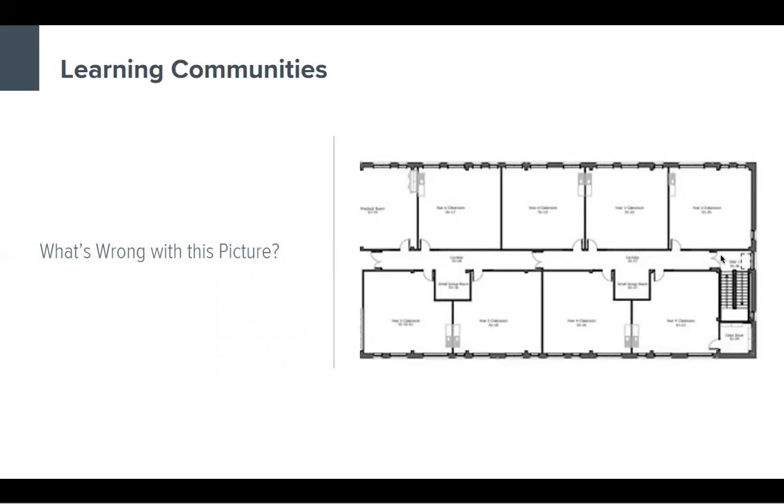But it's really an egg crate, and it's a multi-story building with very little connection between the floors, no connection between the classrooms, and narrow hallways void of just about everything. So step number one, we've got to get away from that.

So what if we actually created communities, learning communities that support collaborative learning? And we began to think about the idea of a front porch. In a neighborhood, you can sit on your front porch and it sort of creates a sign that maybe you want to talk to your neighbors or just see what's going on around you. So it's sort of that interstitial space between the privacy of your home and the public nature of the street. Well, we can use something very similar in an educational model as well.

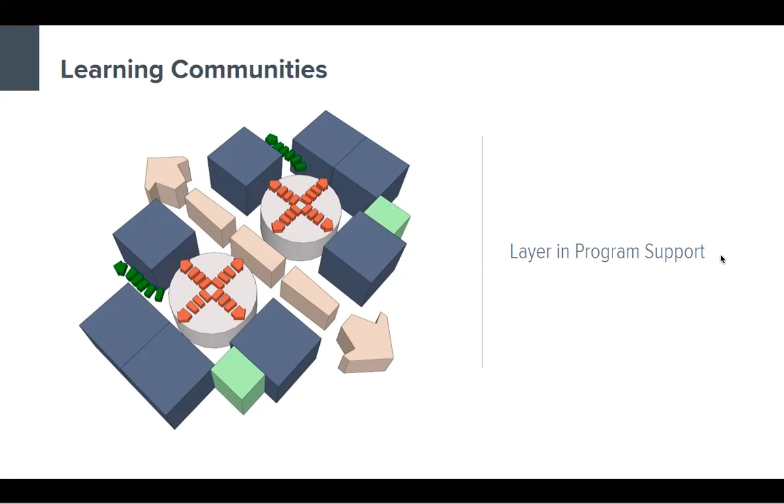And as we'll see in a few minutes on this campus, there was a beautiful creek running through the center of it. So to be able to go outside and get down to the creekside classroom and do other activities there in the courtyard was really important to the overall design of the school. So we're not just looking at the building itself, but we're looking at how the connection between indoors and outdoors can promote PBL teaching and what we can do outside to support those as well.

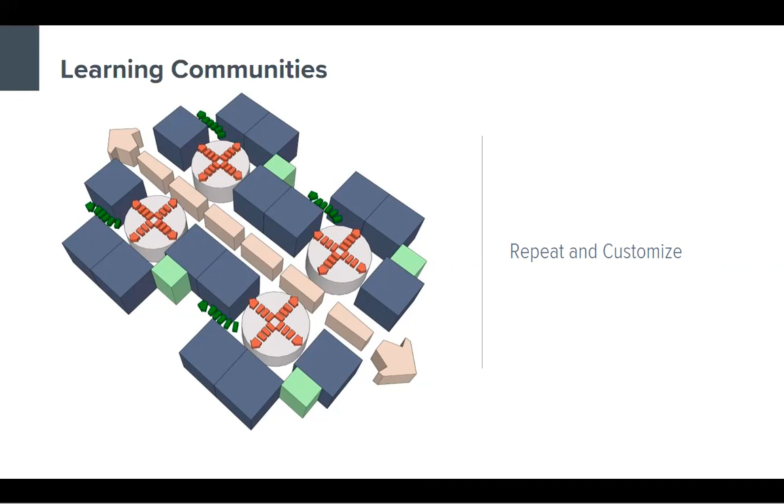But what we actually were able to do, and it's even more obvious in the middle school, is we were able to shorten the hallway length and distribute some of the overall length of that hallway into the collaborative spaces. So it actually made a more efficient floor plan with more square footage of the overall plan usable for education and learning purposes.

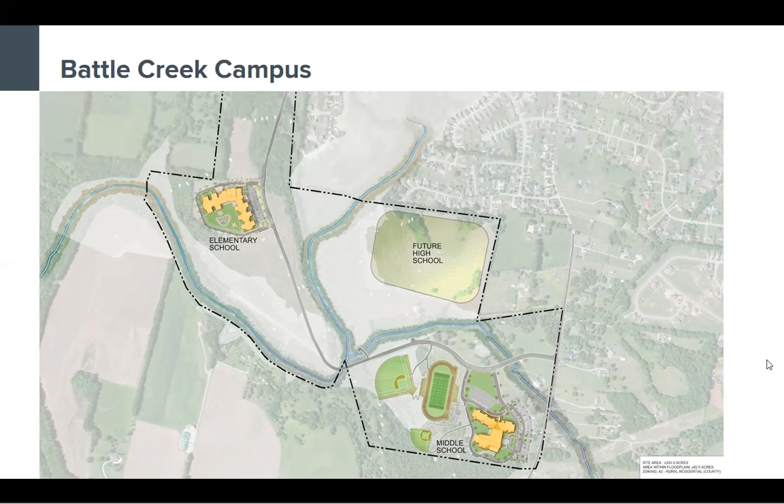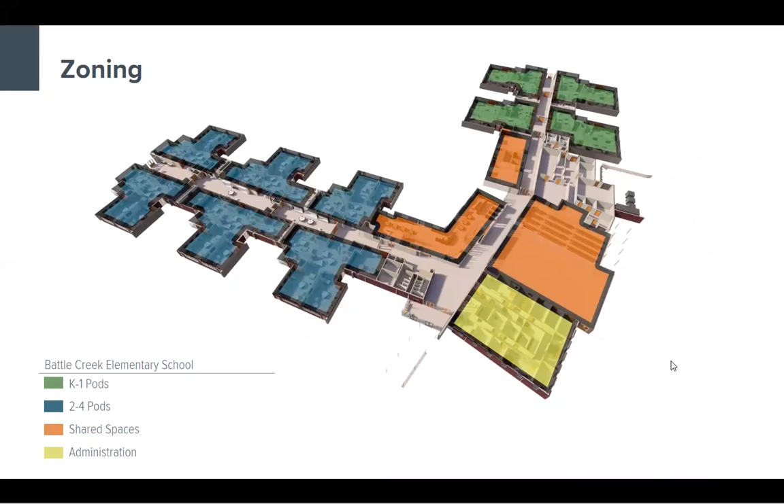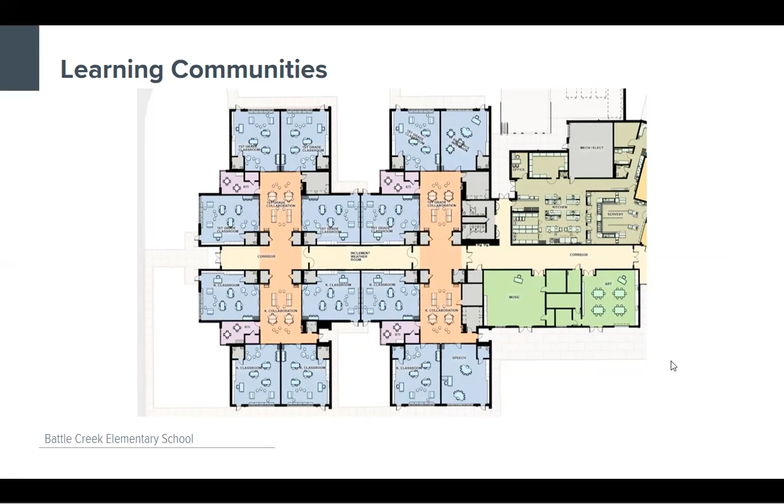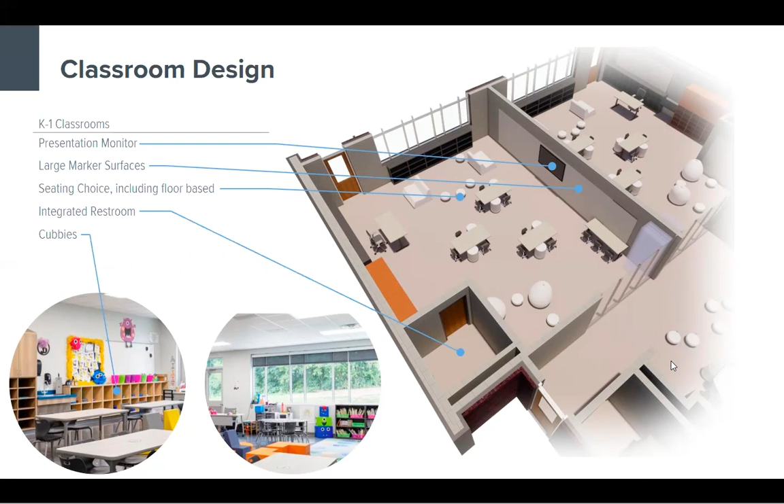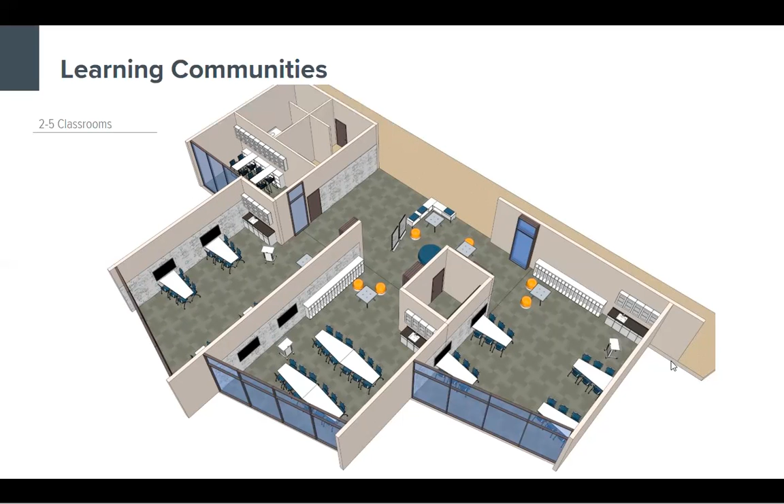We actually talked quite a bit about the front of the room. Does the classroom get a front of room? Does the teacher need a desk? Does she need a lectern? Does he need space to store his personal things? And so we actually settled on a lectern in our original planning with some casework behind it with a little bit of lockable space. By the time we got to final documents, each teacher did in fact have a stationary desk, and I think they appreciated a little bit of a landing pad. But based on the overall classroom design, teachers are still up and moving around and really engaging within the classroom.

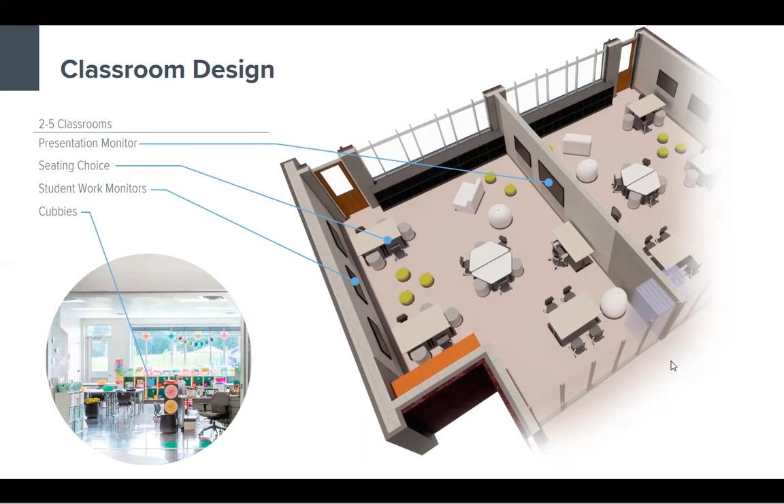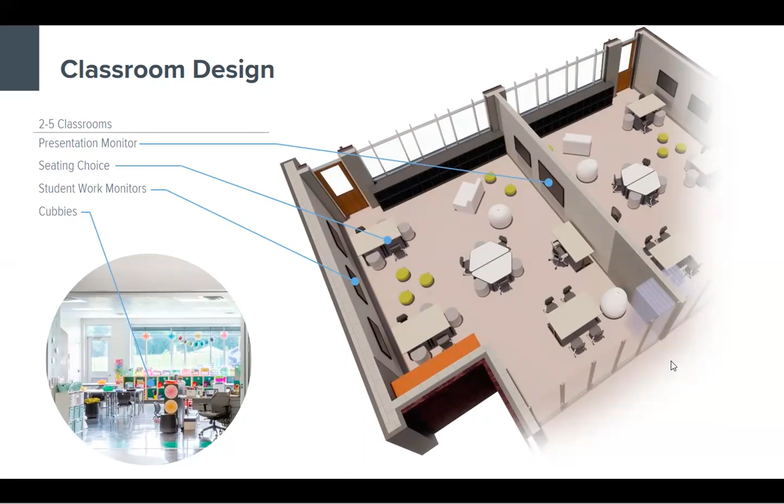So kind of zooming in on this classroom, it's a lot of the same concepts, just modified for the older age of the children. And like Ben mentioned, we do still have that larger presentation monitor that is teacher focused, but here you start to see the addition of more monitors. And while maintaining the flexibility of the furniture within the room, sort of syncing up some of that furniture with the monitors for small group use, that allows students to project directly to those individual monitors. This really reduces the front of room approach and allows visibility and mobility throughout the space.

But we still have provided, as you can see, a lot of different options within the seating that allows kids to have choices in play. So whether you have a wiggler or a stander or a floor sitter, or somebody who just wants a normal chair, they have that flexibility to kind of rearrange and maybe even make a choice from day to day within this arrangement.

Yeah, so for my personal learning style as an introverted wiggler, I guess I would be sitting on a stool in the corner in this example.

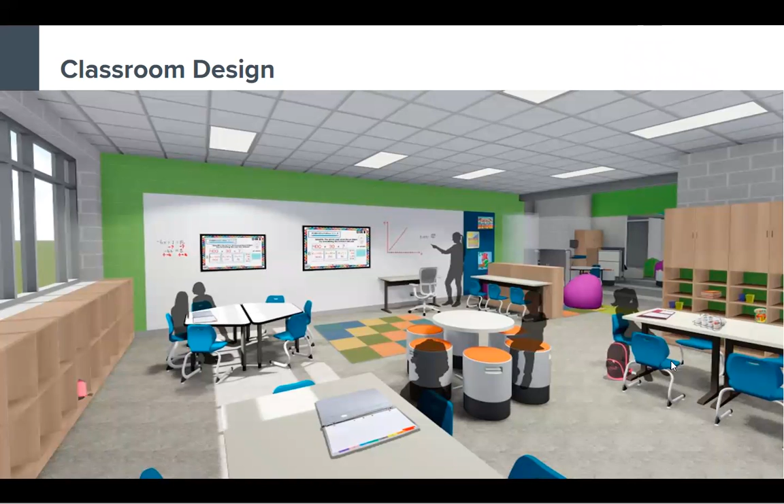So here's a rendering, not quite as early as the one we looked at before, but you can start to see how we illustrated this and also introduced the storage component within the classroom. So there's a lot of writable space, all magnetic. We do have a little bit of tack board, but trying to kind of marry that and have that dual function where it's writable, but you can pin things up, artwork, student work, things like that on those writable surfaces.

Storage for students that is personal storage, but also on the right-hand side, you see those student-centric storage cubbies where things that are kind of makerspace-like, but that actually live in the classroom themselves are easily accessed by students as needed as they're in their self-directed learning. And then you really start to see the different options in seating and furniture arrangement. We have little stools that allow for movement. There you see the chairs, you also see the floor seating area with little carpet squares, and then beanbag chairs, kind of just that big variety starting to show up in a rendered format.

So focusing just a little bit on the middle school. The middle school is a two-story design. It's actually sort of built into a hillside. So we had some unique opportunities for multi-level outdoor spaces. This begins to show one of the neighborhoods for the middle school. So each neighborhood is actually a two-story design. So similar grades are on the first floor and the second floor. And each pod actually has a connecting stair with glass to the outdoors.

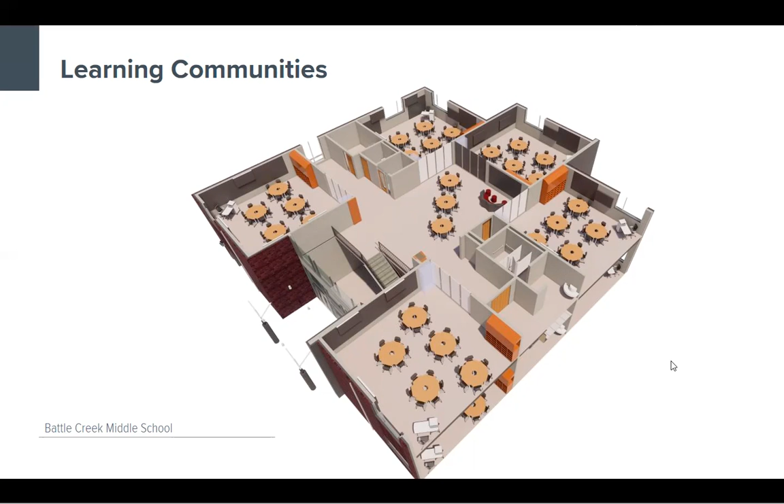This is a view of the overall middle school. The entry is here in the front in the middle. This is a 1-story portion of the school as the site is higher at the front, and then the site actually slopes into a 2-story position here at the rear. So that also gave us a great opportunity. Once you come into the building, you have a nice generous lobby. You have a large connecting stair that moves downstairs, and also a railing that overlooks more public space as you access the gym and practice gym in the more public areas of the school.

Another thing that we were able to accomplish with the specific site condition is this building actually has no fire stairs. So there's a central sort of collaboration and connectivity stair, and then there are stairs in each of the student pods in blue. One of them actually does have a door, so it acts as a fire stair, but it's very open, very inviting. We know that stairs are actually one of the places on our list of spaces where bullying begins to happen. So the more open and the more inviting those spaces are, the safer students are within those spaces.

One other thing to note here in Murray County, 5th grade is actually part of the middle school curriculum. So you can see that space in green. And we actually modeled those directly off of the pod design from the elementary school and duplicated that onto this position of the school. The blue are the more specific to the middle schoolers that we looked at in the last slide. So it actually gives the 5th graders a little bit of an opportunity to be separate over here in their individual wing. They have a classroom style and a learning style that they're still familiar with, but they're beginning to slowly integrate into middle school.

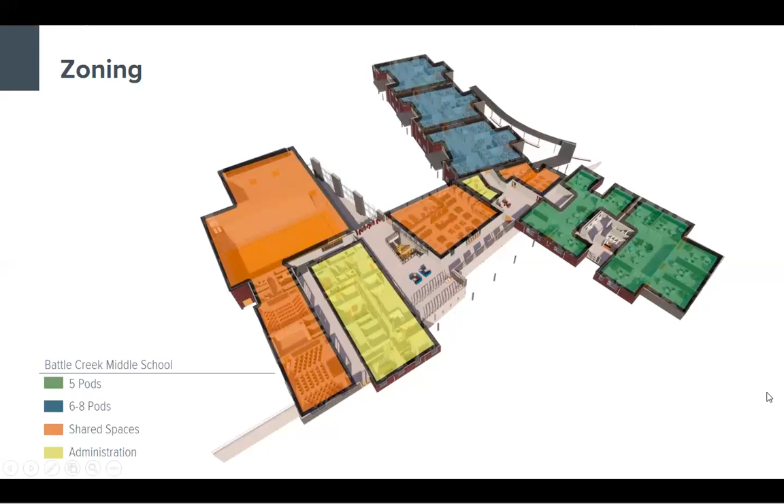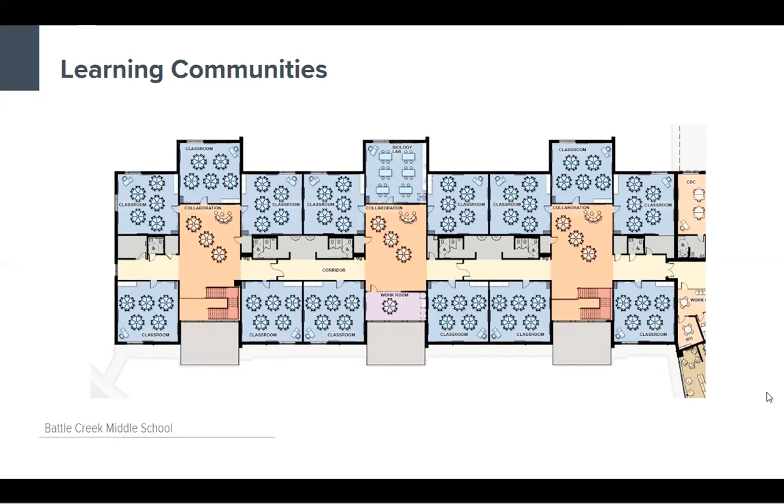Once again, the yellow is administration. The orange is central public spaces. So this is a floor plan of the middle school. Students are also beginning to deal with more autonomy at this level. So we didn't have specific faculty workrooms directly off of each pod. You can see one in the center so that teachers can come to that position and do some work if they need to, or provide some one-on-one tutoring. But really, we're beginning to give students more autonomy, more room to roam, and just more independence in general.

So this is a view of the middle school collaborative zone, really similar theme to the elementary school, just updated strategies here. A little bit bigger furniture, of course. So starting to take a look at that specific design for the 6th through 8th classrooms. As Ben mentioned, the 5th grade classrooms are sort of a duplication of what we saw in the elementary school. But here in the 6th through 8th classrooms, you start to see a lot more independent learning and self-directed learning, some group work, but still independent from the teacher.

So we do have the presentation monitor here. We have monitors throughout the space for visibility for students. Instead of the lecture style, row after row, where everybody needs to be in a specific position to be able to see the screen, we can do a more collaborative approach with the furniture, as you see, and everybody still can see what's happening as the teacher is projecting what they're working on. But if you see in the photograph, the tables are still individual. So if you have a group of 4, that works. If they need to expand that into a group of 6 or decrease to a group of 2, that flexibility is there. And they have access to be able to see the presentation monitor and access to whiteboard walls all the way around the perimeter of the space.

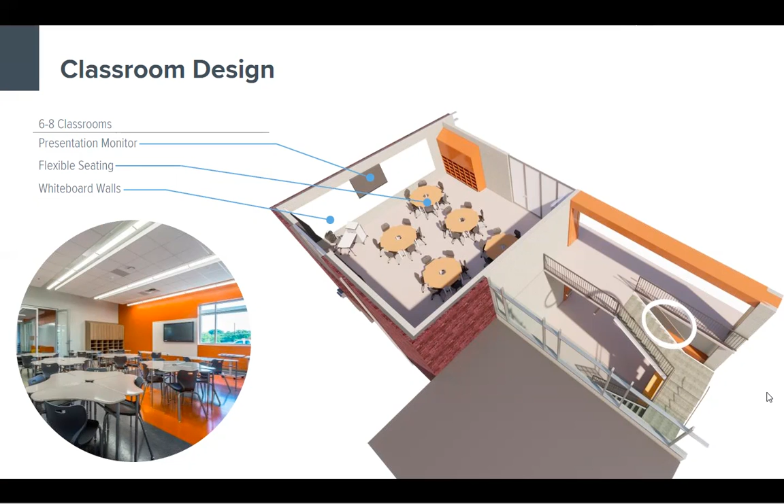And one thing to start noting here that we'll look at a little bit further in the presentation is natural light. Everybody that has worked on school design knows wall space is a premium. So whether it's windows or writing surfaces or storage cubbies or presentation monitors, you really have to balance all of those things. So here in the middle school, we actually reduced the size of the exterior windows just a little bit to accomplish our overall goals for other wall-based functions.

So let's talk about the media center just a moment. What's a media center anymore? I think a library is probably the most heavily questioned and the most flexible space, and potentially even a space that people wonder, where's it headed? What's it look like? Do we even need it anymore? So we actually had a lot of fun working on the media center in this school. As the center of a PBL curriculum, we knew that it was far beyond just a space to store books. And actually the number of books is even less than we originally anticipated when we were designing the space. So it truly becomes the heart of a PBL curriculum, and it's located at the heart of the school, right off the lobby, with lots of glass and connectivity.

Like any good media center, there is a space here for kind of a story time space. So we can actually get 3 different classrooms together for a presentation. And of course, on the left, we see some cubbies. Students love those, providing different areas for them to be by themselves or read a book together with a friend, and also provides some general space separation as well.

So looking at the plan of this space, one thing we were told right off the bat is, based on the school's budget, they would only ever have 1 librarian, but they wanted 2 media centers. So we said, let's combine them, but let's put the control position at the center so you can see both directions and provide support to both the younger and the older students, but create a little bit more of a separated space as well. So you can see here in the center is that story time zone, right off the lobby, right off the main entrance, with the younger students having their space on this side and the older students in this direction.

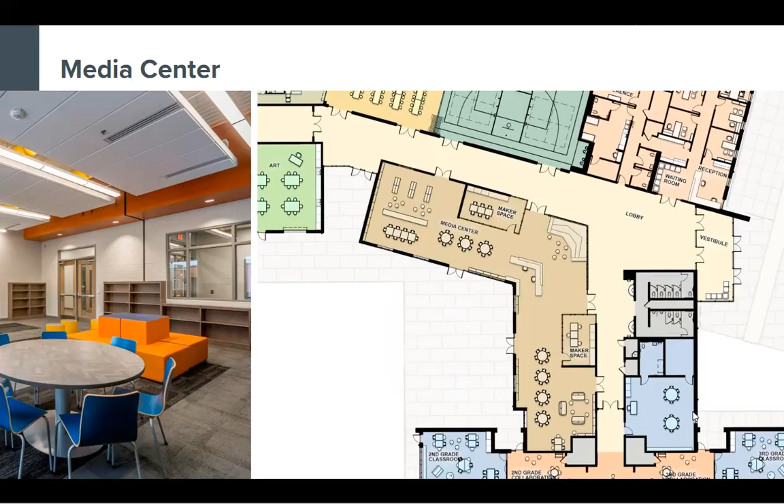Here's a couple views of the media center. You can see directly into that makerspace there. Lots of pegboard on the wall, lots of space to store projects and materials.

And this is one of the spaces, each of these within the school, where students can actually begin to host semester-long projects. So you can actually secure the door when necessary so that things can grow or age over time, depending on the project you're working on, or just sit in between work sessions. So you have a secure space for that to sit and land throughout the semester.

On the right, there were several spaces throughout the school where we actually color coded the different utilities, once again, providing a learning opportunity. So you can begin to talk to students about fire suppression and hot water, cold water, different air movement. We also, in the school, all of the server rooms had glass doors and they were lit so that you can see into those rooms and see the computers and not just hide those behind solid doors. So really trying to create educational opportunities in the building as well.

This is a plan of the upper school or middle school media center. We actually put a STEM lab directly in the media center here as well so that they can have an even larger version of that makerspace. It can be used for separate classroom time. It can be used for a larger STEM lab, or it can be used in conjunction with other media-based projects.

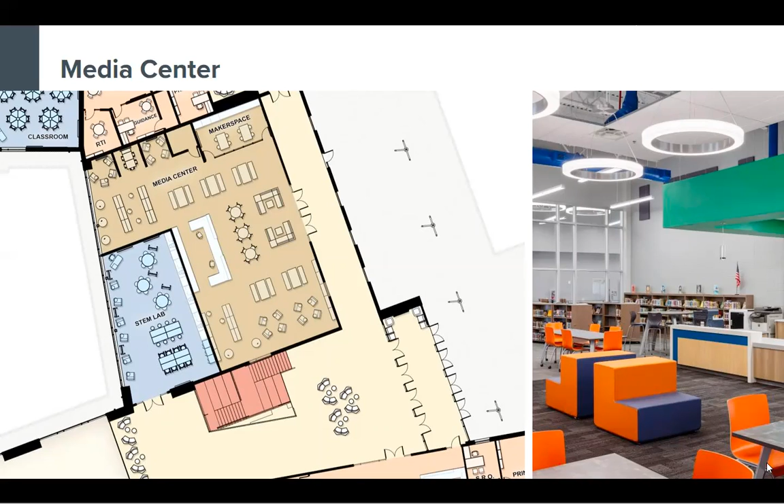So in addition to the media center being sort of the hub of the school and the place where students from different classrooms come together and work on projects that are from different disciplines, we wanted to think about opportunities to do that throughout the entire school. So we came up with a couple of different ways to handle that and thinking about using both larger spaces and smaller spaces.

So here you see an early rendering of the corridor on the kindergarten first grade wing and bringing a life to that corridor and a place where classes and education can actually happen. The corridors are a little bit wider here to allow for that, to allow for a gathering of students. And so you actually see artwork being displayed, but it could also be a place where students could come together with a teacher and learn.

Up in the upper right-hand corner, you see the backside of the cubbies that we saw in the media center, but we used the backside to provide a writable surface and desk or tables so that students could actually have a class here. And in the bottom right-hand corner, you see the art room for the elementary school, which has a glass garage door that actually opens onto a patio space designed specifically for that art classroom to be able to move in and out of the classroom as needed.

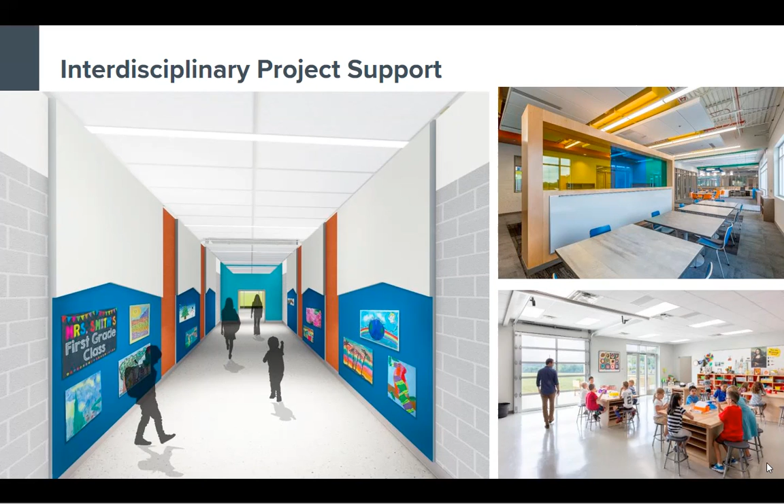In general, we really feel like schools over the last 50 years have begun to actually get more boring, with cheaper materials and lots of thought towards long-term durability. And those are important things. Budgets are realities, and durability is a very real thing. But we wanted to give students a sense of ownership and a sense of place, and owning something nice, being in a space that inspires them with natural light and not designed down to the minimum square footage everywhere.

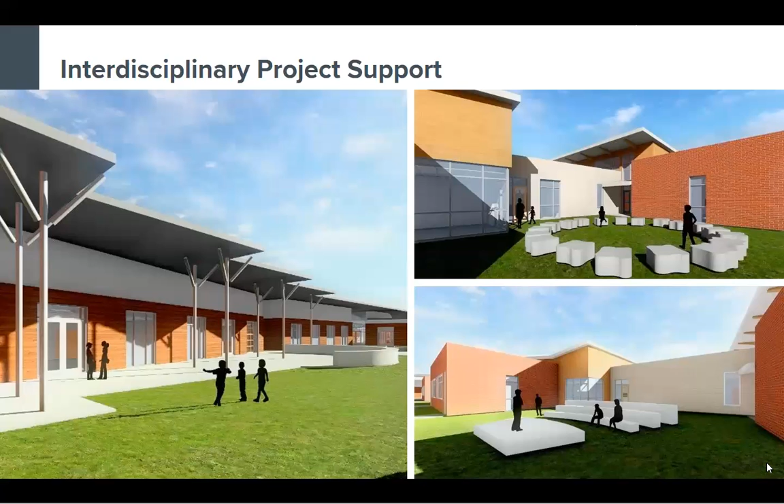This school, over the past couple of years, we've been lucky enough to win several awards, both for design, for educational space, and for all sorts of different overall subjects, interior design as well. But as lofty as our goals were in the beginning, not everything came to be. So here I actually wanted to highlight a few things we didn't get to add into the project. In the top right, you can see some tall roof section with some roof glass monitors that would have allowed more light down into the collaboration spaces. That was something that unfortunately the budget didn't allow for.

We also had some ideas about creating really specific outdoor learning zones. You can see the campfire ring and the amphitheater style learning. Those were not nixed entirely, but they were deferred and will likely be built in the next couple of years, but we weren't able to afford those right off the bat.

And on the left, you see there in the center, the door that opens up to the art classroom and also goes into the central portion of the school. So we wanted to include some outdoor roof area and a seat wall and a larger patio here for those craft projects to move outside. And the patio and the seat wall will happen in the future, but are not there yet. So it's not a bad thing to weigh different things along the way and take some things back out of the design, but be proud of what you're left with and make it the best you can.

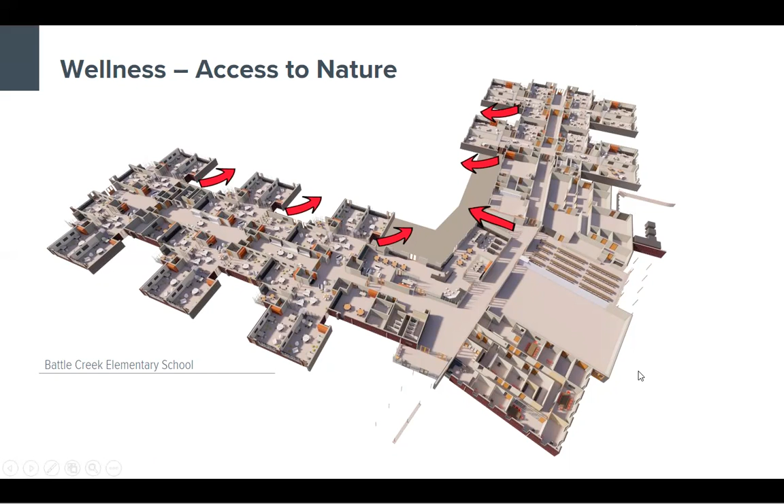We actually carved out a little bit of square footage so you can get directly from the central corridor to the outside as well. We fought hard for that so you can get from the cafeteria to the central courtyard without having to go through a classroom. And this is an overall view of the elementary school. You can tell it is largely designed around that central secured play space. Each room has easy access to that. And then of course the creek is down to the left with a future outdoor creekside classroom planned for down there as well.

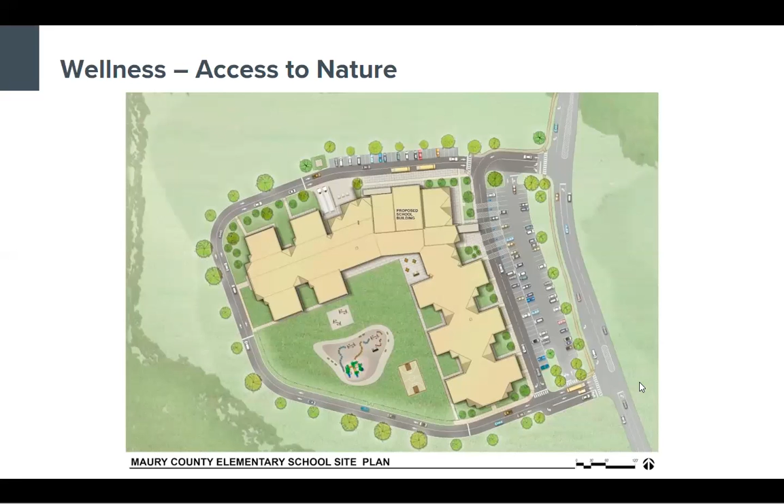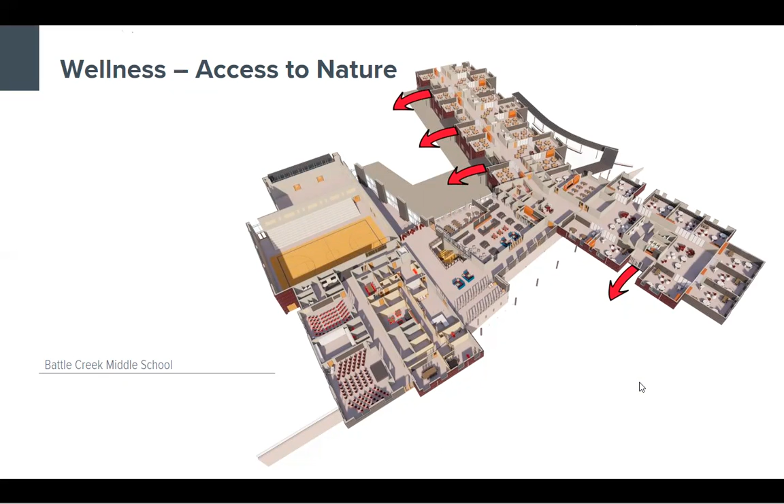And an overall view of the middle school. These work just a little bit differently with the two-story arrangement at the top, but students can move down the stairs to their central courtyard for the older students. And then the fifth graders actually can move from their pods to a play space out front as well. So separated outdoor spaces as well as indoor spaces.

And this is a view of that overall campus. You can see the entry to the bottom right. Lots of parking with overflow parking, and then the students that arrive by bus arrive at the top of the page so that they can queue in different areas and wait for the bus or their parents in different spaces.

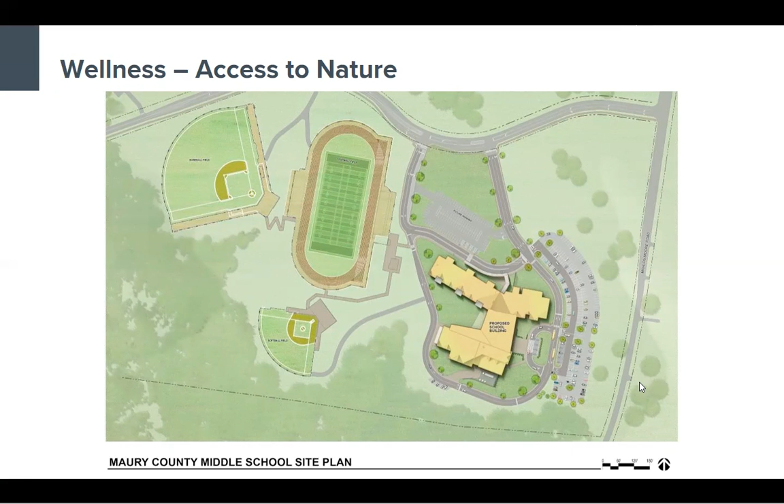So health and movement are an extremely important factor when it comes to wellness in education, for both the physical and the mental learning and well-being of students. So there were several things that we did, both big and small, to try to incorporate health and movement into just the everyday use of the building. Obviously, a gymnasium is a dedicated space for learning about health and movement, but we wanted to incorporate details that would allow for that to happen maybe when students didn't even recognize that it was happening.

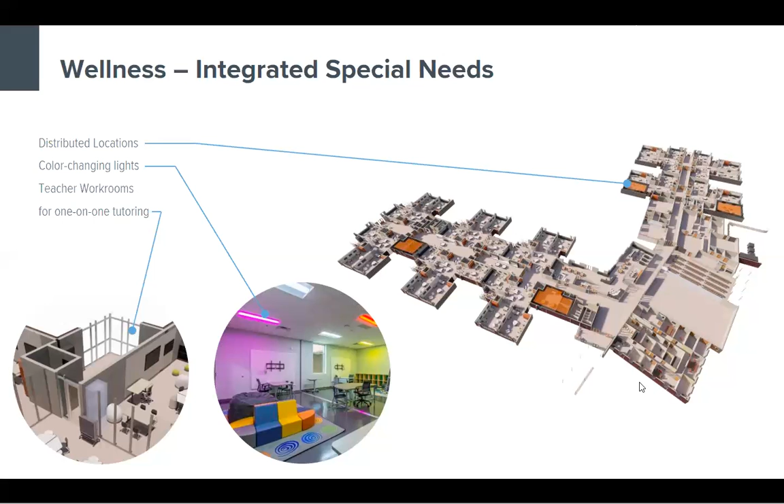So in conclusion, we hope you've enjoyed a little peek into the Battle Creek schools in Maury County, Tennessee. If you're ever in the area, they have a great group of students that have an entire tour set up, and they love giving tours of their building. So be sure and check it out if you're ever down there. So hopefully we've covered all the learning objectives, specifically project-based learning, wellness, and supporting different learning styles.